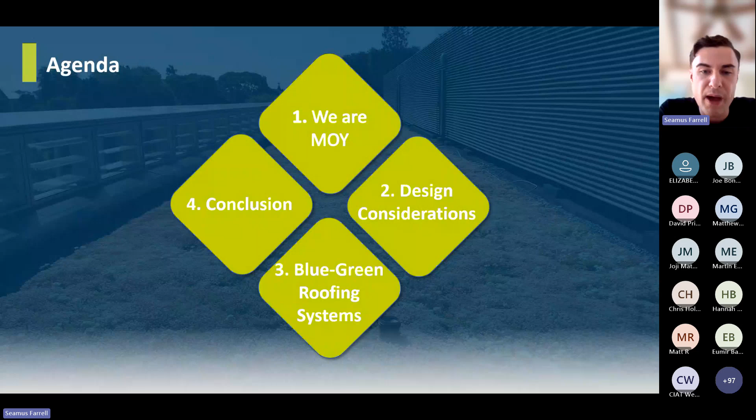Firstly, I'll explain the technology available to the roof designer. I'll present a logic chain that can be applied to the design process. I'll then alert you to the challenges that a green roof can present, and I will assist you in avoiding difficulties that may arise. And all in all, I'll explain the processes involved in the development of a blue-green roof waterproofing specification. So the agenda for today, firstly, I'm going to briefly introduce Moy to those who aren't familiar with us. I'll then go through some of the design considerations for when working with blue-green roofs on projects. And then I'll go through in detail the different systems available to the clients and the benefits of installing blue-green roofs.

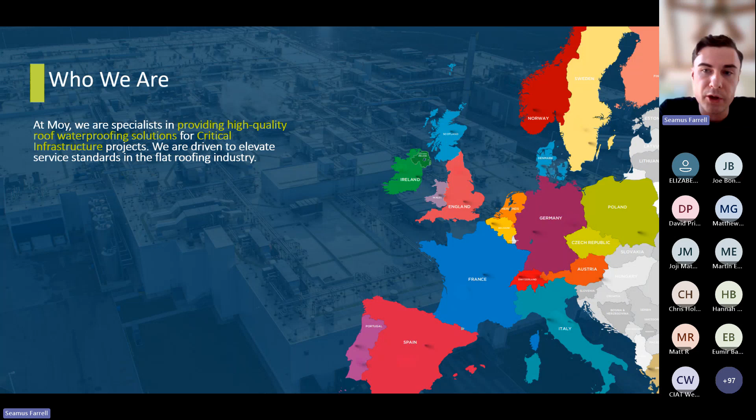So very briefly, Moy are a privately owned business that specialise in delivering high quality flat roof waterproofing systems that provide critical solutions to infrastructure across Ireland, Europe and the UK. Our core values revolve around integrity, partnerships, social responsibility and continuous evolution, with the purpose to provide our customers with a high quality technical service and a seamless experience from the conception to completion of a project.

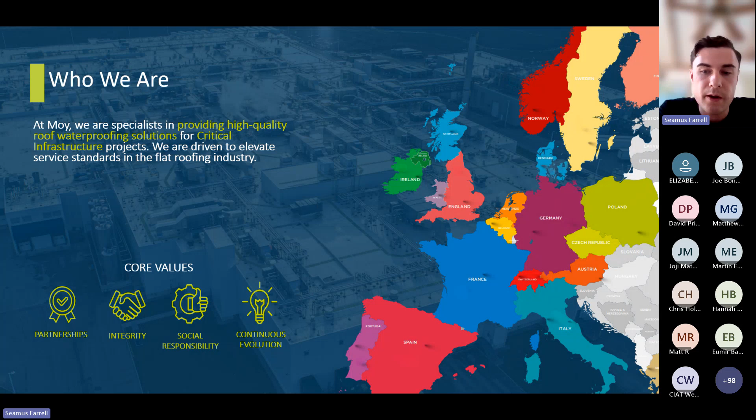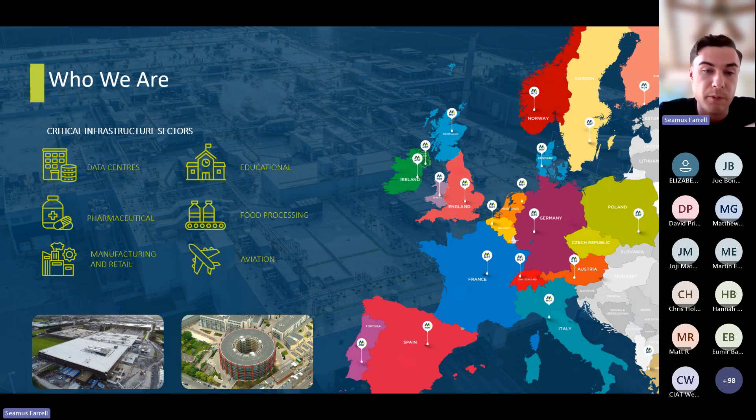And these pins highlight the countries where our business has experience in supporting critical infrastructure projects. And these projects consist of some of the most challenging sectors known to the flat roofing industry, such as data centres and pharmaceutical facilities. However, in the UK and Ireland, we'll work on every sector, from small residential developments to large commercial projects. So now I've completed the brief introduction, it's time to move on to the design considerations for when designing a blue-green roof system.

So firstly, to start off the presentation, what is a blue-green roof? And I'll begin with some simple definitions. I'll firstly explain the definition of a blue roof, and then I'll explain the definition of a green roof, and these combined create a blue-green roof system. So a blue roof is the roof of a building that is designed to provide temporary water storage and release it over a period of time, usually between 24 and 48 hours. And a green roof building is any structure upon which the final finish will be a vegetative layer of any kind.

And to summarise the different layers of a blue-green roof system, which you'll see on screen there, from top to bottom, firstly, the partial or complete covering of vegetation. And this is what's seen once the roof is completely installed. This can be an extensive sedum blanket. It could be shrubs. It could be trees, water features. It's essentially the finished roof, and it's what's seen when the client looks out on the building.

Next is the growing medium. So this is essentially the soil layer. It's a fancy word for the soil layer to allow that vegetation to grow and flourish. Then we have the filtration layer, which essentially blocks sediment from reaching the drainage system, and that's installed directly underneath the living layers of the roof. Then we have the drainage and reservoir board and the attenuation void former.

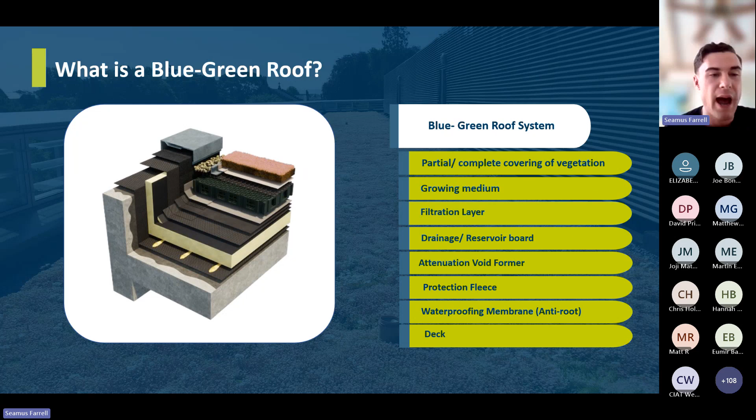And then we have the typical flat roof waterproofing membrane, which will usually be an anti-root membrane to resist the damage from roots, and then your insulation and your vapor control layer. So I'm just going to briefly go through some of the key terminology that's involved in blue roof systems. Some of these definitions are more engineering definitions as opposed to something that an architect would be familiar with. So I'll begin with the HMAX, which stands for hydraulic max.

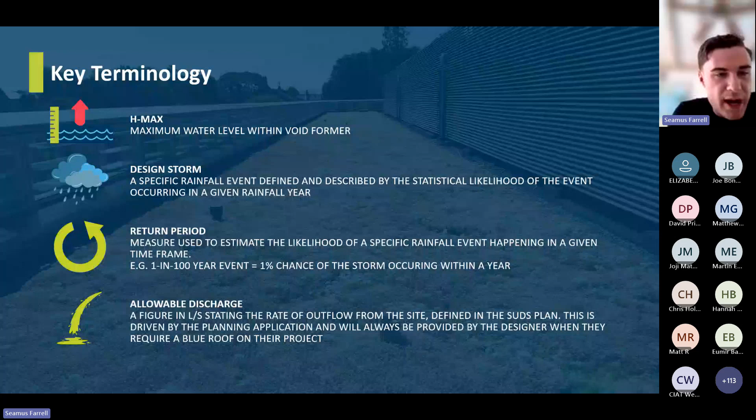Hi, Seamus. Sorry guys, I think I just cut out there. Can you guys still hear me? Yeah, hi, Seamus. You can hear me. I think it cut out for a little bit, probably about half a minute back, roughly. Perfect. So was I on this slide here? The key terminology you were on. Yeah. And I believe when it cut out, you were talking about allowable discharge. Okay, perfect. I'll just go back to the return period part just in case anyone missed that.

Apologies about that, guys. So the return period is essentially a measure that's used to estimate the likelihood of a specific rainfall event happening within a given time frame. And the most common one is a 1 in 100 year event. So this basically means it's a 1% chance of the storm occurring within a given year. So every project that we look at, there will be a specific return period which the roof will be designed to contain. And then finally, allowable discharge.

So this is a figure that's stated in litres per second, and it states the rate of outflow from the site. And this is usually defined within the SUDS plan. It's driven by the planning application, and it'll always be provided to us at the beginning of a project when the designer requires a blue roof on the project. So that's just some of the key terminology involved in blue roof systems.

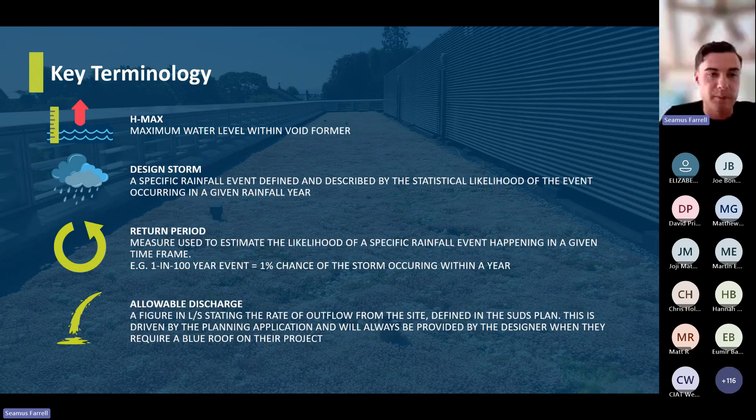So moving on to some of the benefits of blue-green roof systems. Blue roofs are designed to slowly drain stormwater over a period of time, and they reduce the impact of what's called pluvial flooding. This is a type of flooding that occurs when the public drainage system overflows due to heavy rainfall. They reduce the pollution of waterways in urban areas, which is caused by combined sewer overflows. So in urban areas such as the centre of London or the centre of Dublin, older cities, there's an old drainage system, and the foul and the surface water is actually drained within the same pipe.

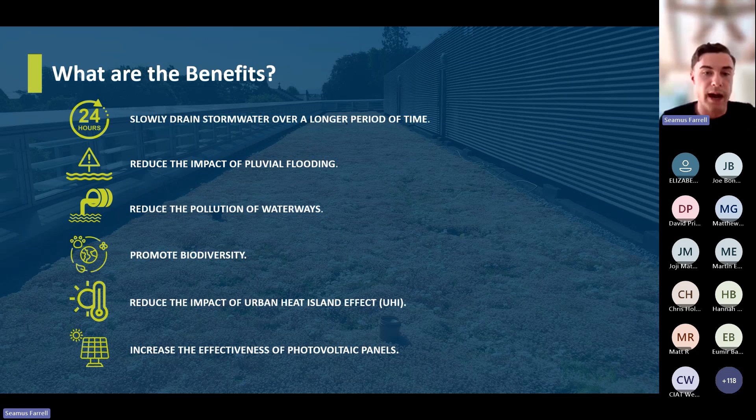And when there is an extreme weather event, these pipes tend to overflow at the discharge points, which is always at a water body, let's say. So that pollution can obviously cause damage to wildlife within that waterway. They can also promote biodiversity when combined with green roof finishes. They can store water on roofs, which actually reduces the impact of what's called the urban heat island effect, and this can ultimately reduce the cost of cooling. And they can also increase the effectiveness of PV panels on the roof due to this cooling effect on the surface of the roof system.

So why are blue-green roofs specified? The main driver for the specification of these is the planning requirements set out by local councils. And it's mainly where space is an issue for other sustainable urban drainage features, and this includes attenuation ponds and underground attenuation tanks. As we are building in these urban areas, there is usually a lack of space for these large attenuation tanks. So that is where blue roofs can sometimes be the only option to provide this water attenuation. And clients and designers sometimes do specify blue roofs or blue-green roofs for aesthetic purposes when combined with green roofs, or to provide water for rainwater harvesting.

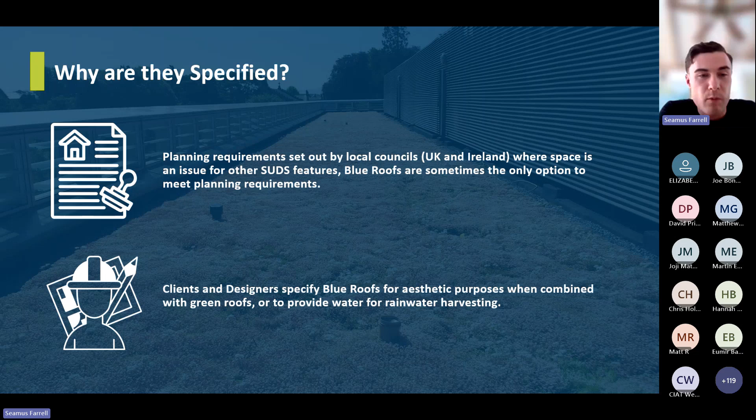So moving on to the different waterproofing systems and finishes which can be used in conjunction with a blue-green roof. Firstly, a modified bitumen system which can be fully bonded from deck to the waterproofing is the most common system specified with a blue-green roof. This is because these are tried and tested systems. They're typically the most robust system for a typical roof area.

Single ply membranes, which you'll see in the middle, can also be used. However, we will ensure as the supplier that the most robust membrane is specified due to the addition of the water attenuation layer and that extra level of water that's attenuated on the roof. And finally, hot melt systems or podium deck systems. These are used in areas with extreme traffic, such as a ground floor podium, with fire truck or vehicle access. Any roof which has a higher amount of traffic is where we would typically specify a hot melt system.

And then the finishes, so there is a range of finishes available. The most common one is just a typical green roof with a sedum layer. Paving and ballast can also be used in conjunction with the blue roof. These are installed in the same way as a green roof, on top of the void former attenuation layer.

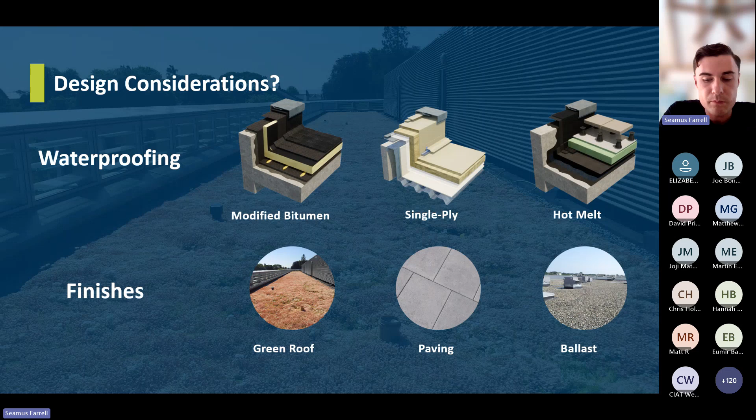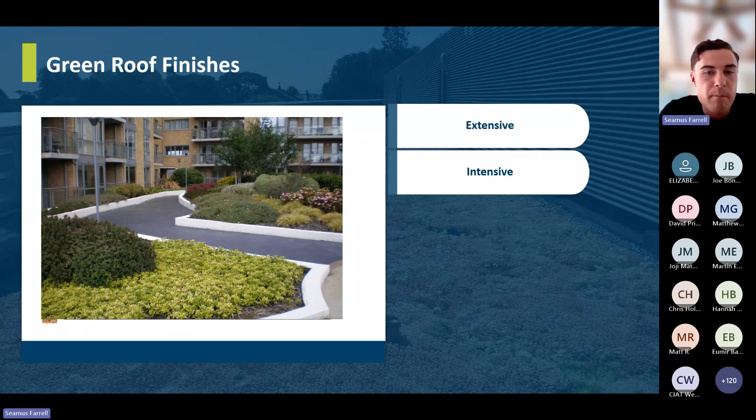And moving on, I'm just going to touch on the different types of green roofs. So these are the finishes that will be installed above the blue roof system. The two main different types are intensive and extensive. Extensive green roofs are typically the most common form, because they're low maintenance and they're a lightweight system. They're usually used on roofs with no general access, so roofs that are only accessed for biannual maintenance.

They have thin layers of growing medium, typically between 50 to 150 millimeters in depth. They're really only used for aesthetic and environmental purposes rather than functioning as an accessible roof space. And the big point on extensive green roofs is they can withstand harsh environments such as wind, droughts, flooding, and high and low temperatures.

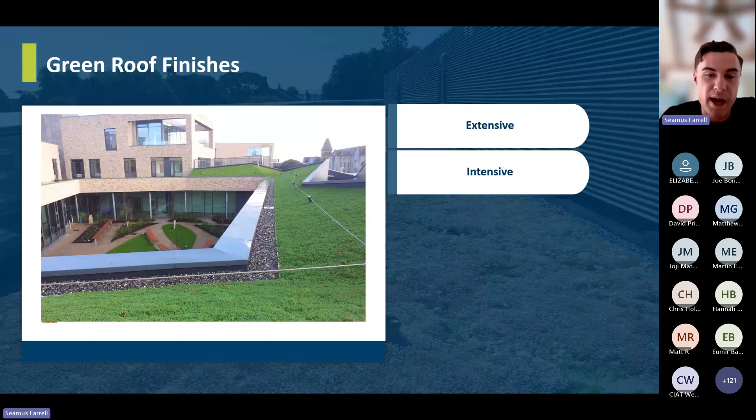Intensive green roofs. These are roofs that typically have a substrate or a soil layer, typically over 200 millimeters. And there's a greater scope to design and grow elaborate roof gardens. This is usually done in conjunction with a landscape architect appointed for the project. They're more suited to roofs with high visibility and more public access. And the opportunities are endless with the different vegetation that this roof can support, such as flower beds, trees, water features, benches, and gravel paths.

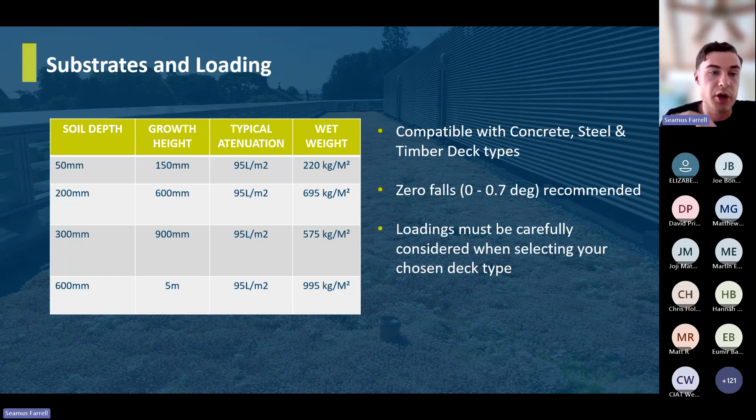Loadings are fundamentally important due to the additional saturated weight of the blue-green roof system, depending on the design and depth of the growing medium. So it's important that we engage with the engineers early on when a blue roof is being specified to ensure that they take into account the added wet weight of the roof system.

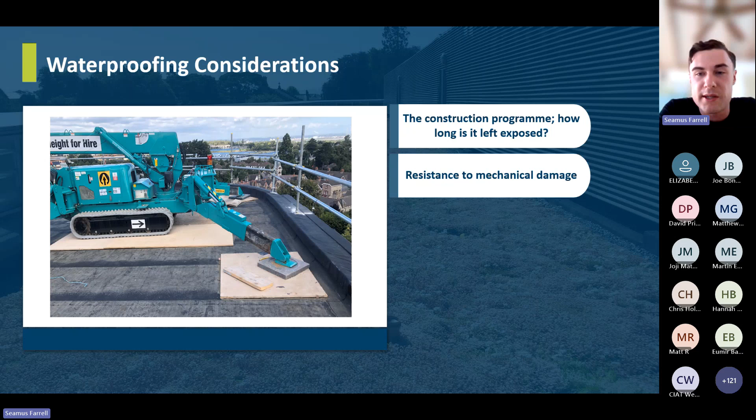So moving on to the considerations for the waterproofing. One of the most important elements of the design is the selection of the appropriate type of waterproofing. We always ask designers to consider the manner in which the building is to be constructed and ask if the waterproofing system must withstand hardship while the roof is used as a working platform.

The ability of the chosen system to withstand the rigorous attack of plant roots is really important for blue-green roofs, as the waterproofing system must be root resistant as well as being robust. With this in mind, the system specification that we'll propose will be discussed at length to enable us to propose the best solution for individual projects. This is to enable you to select a waterproofing system with a proven track record in successful blue-green roofs.

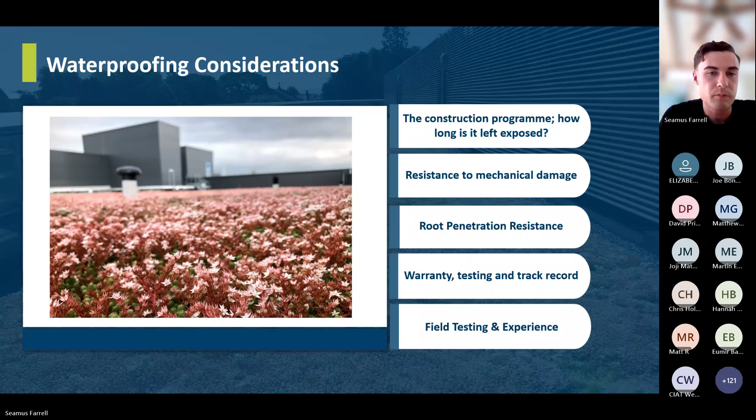So the next element to discuss is the attenuation layer, and this is kind of the key element within a blue-green roof system. So the thickness and type of layer that will be used will always depend on the sustainable urban drainage requirements that are set out by the local planning authority, and also the site master plan designed by the project architect. So the HMAX, or the attenuation level, will be determined by the project-specific blue roof calculation, which must be completed to confirm that the design will actually work in practice.

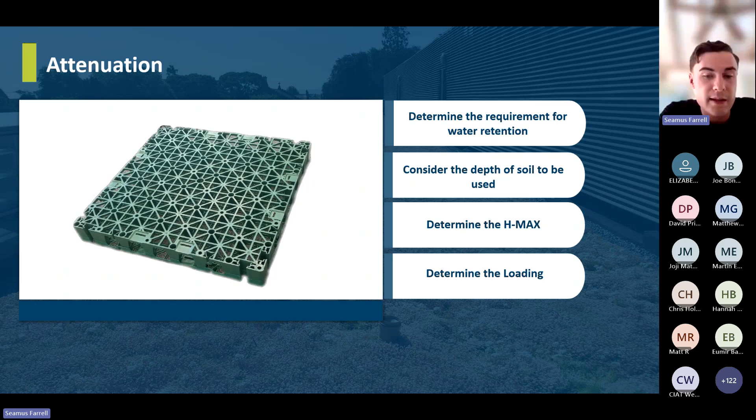And the type of void former, which you can see on screen there, will be determined by the loading requirement for the roof system. For example, a ground floor podium roof will require a void former with a higher compressive strength compared to a roof that is only used for scheduled maintenance. And as a supplier, it's our responsibility to ensure that the correct void former, thickness, and strength is specified for the roof that is being designed.

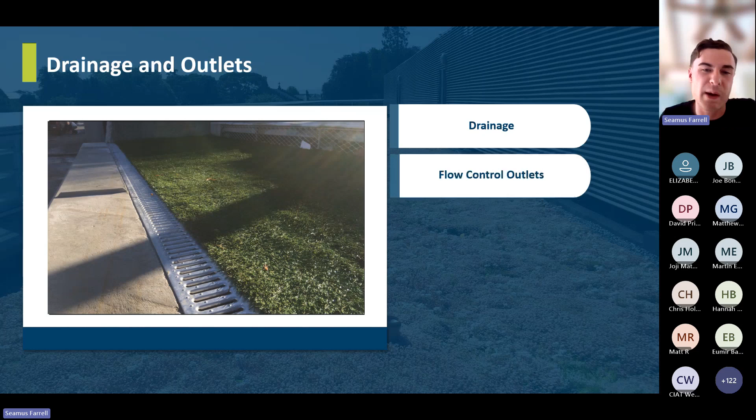So moving on to drainage and outlets, we always get asked by architects and designers how many rainwater outlets should be provided for a given roof area. And as a general rule of thumb, a minimum of 2 outlets are needed to prevent blockage. So, if you only have 1 outlet on the roof, if that outlet does get blocked, that roof will begin to flood. As blue roofs are flow restricted, the outlets allow the slow discharge of rainwater. Usually more outlets are needed on the roof.

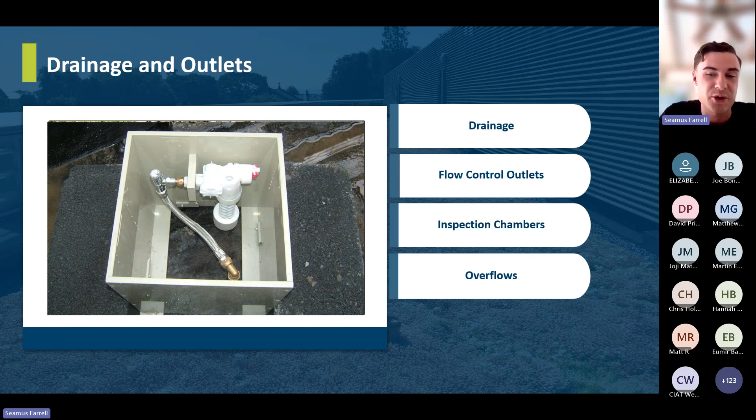However, sufficient overflow outlets should be provided in case there is a rain event that exceeds the design storm of that project. And the invert level of these overflows will be set at the HMAX level. And the inclusion of a green roof will usually give the designer a far greater potential area per outlet, as the flow pattern of water through our green roofs is dramatically slower than runoff from a regular hard surface. And in all cases, the relevant European standards should be read in conjunction with the FLL guides, part 4.3 and 6.3.4, as there's not currently a coherent guide which addresses the issue of drainage from roof gardens.

So looking at the outlets installed on a blue roof more specifically, these blue roof outlets are unlike any other rainwater outlet type, such as a typical gravity drainage outlet or a siphonic outlet. And the purpose of the blue roof outlets is to restrict discharge to a specified rate in litres per second to allow the roof to drain over 24 hours.

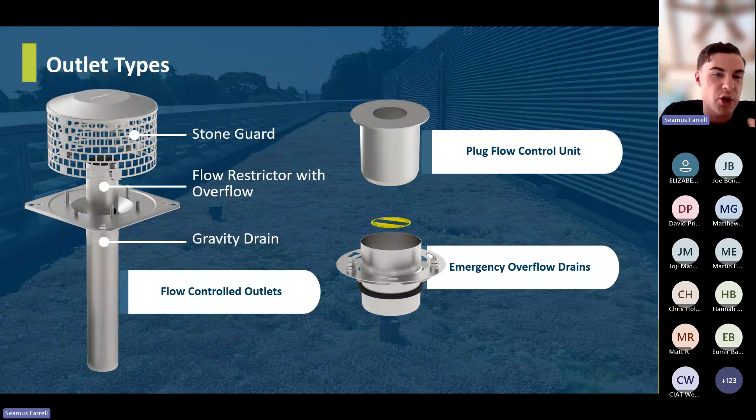And the image on the left is a typical vertical flow restricted outlet. You'll see the flow restrictor, which is installed into the gravity outlet with an orifice which is sized to the specific diameter required. And typically this orifice diameter is between 15 and 30 millimeters and will differ from project to project. This outlet also includes a built-in overflow pipe, ensuring that if the water level does exceed the designed HMAX, the roof will still drain effectively. You'll see on the right hand side, plug outlets can also be used, along with separate emergency overflow outlets, which are both installed into that gravity drain, which you can see noted on the left.

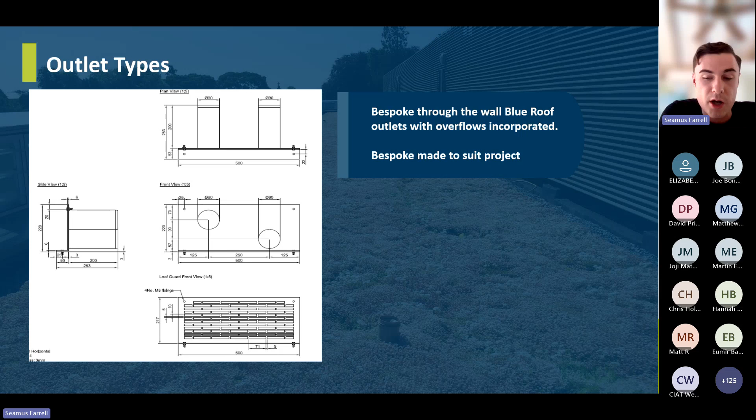So architects always come to us and say, look, designing internal pipework can sometimes be more tricky, depending on the project. So what you see on screen there is actually a shop drawing for a through the wall parapet outlet with the flow restrictor. And above that flow restricted outlet, there is a telltale overflow outlet, which is installed at the HMAX level. And this ensures, if all the outlets do get blocked at the same time, which is of course really unlikely, that once the HMAX level is reached, water will spill off the side of the roof and will notify the client that there is a blockage. And this type of outlet allows designers more flexibility when designing blue-green roof systems. And they're all bespoke made to suit the project-specific calculations.

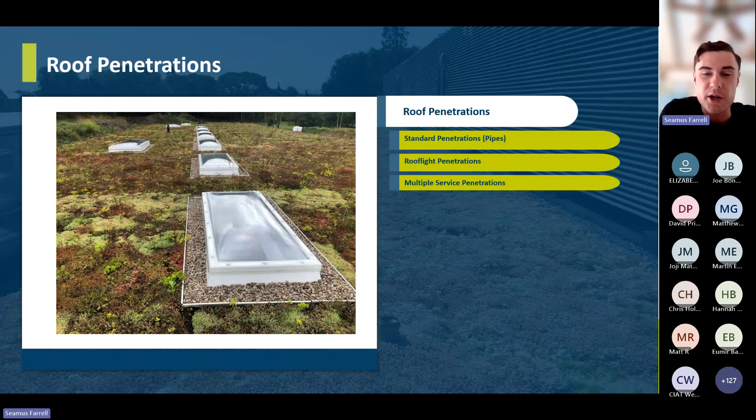So just finishing off the design considerations: roof penetrations, specifically single point penetrations. These are usually to facilitate cables and pipes and can be more difficult to weather than the larger diameter penetrations. Most often, such single point penetrations are an afterthought in roof design. We commonly see instances where an HVAC or an electrical engineering firm are given permission to route cables and take on the weathering responsibility for themselves.

In most of these cases, the cable or the M&E installers will neither have the expertise nor the appropriate materials on hand to ensure a weather-tight seal with a durability that meets or exceeds our expectations for the warranty period. And it's Murphy's Law of waterproofing that states that leaks only occur over managing directors' offices or IT rooms.

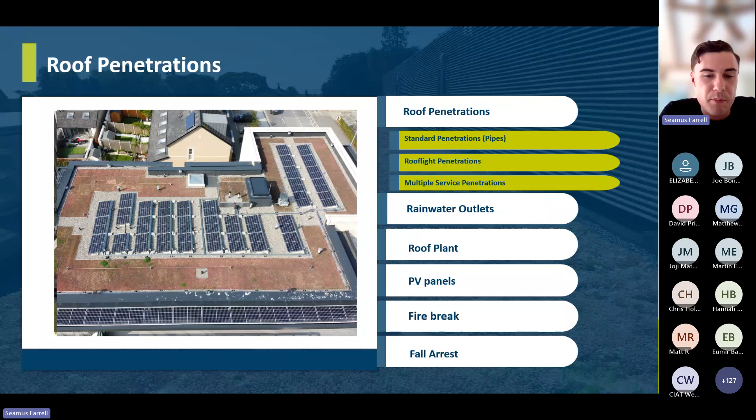So it's really important that all the design considerations are discussed with ourselves early on to ensure a watertight roof area. Therefore, we'll always design and use penetration devices, such as pipe collars or umbrella handles, that are supplied and warranted as part of the waterproofing system and installed only by an approved waterproofing contractor. So they're the design considerations to take into account when designing for a blue-green roof.

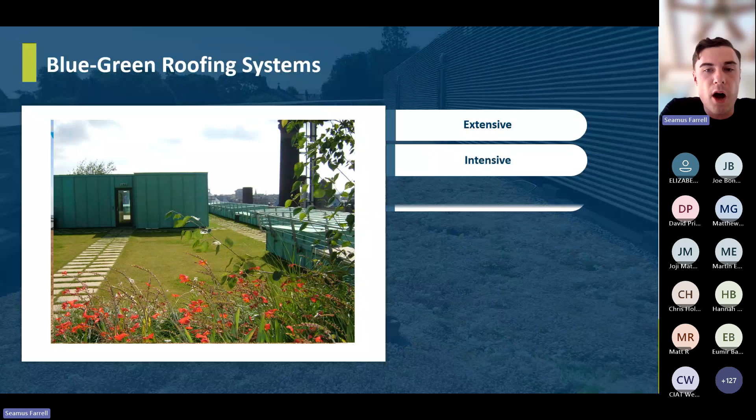In this section, I'll discuss the different types of blue-green roofing systems, the benefits they bring, and some further design considerations. Blue-green roofs with an extensive green roof finish are the most common form of blue-green roofs due to their lightweight nature and low maintenance, while intensive green roof finishes can also be used to provide amenity space for the building residents and also to allow any of you landscape architects to get creative with your design.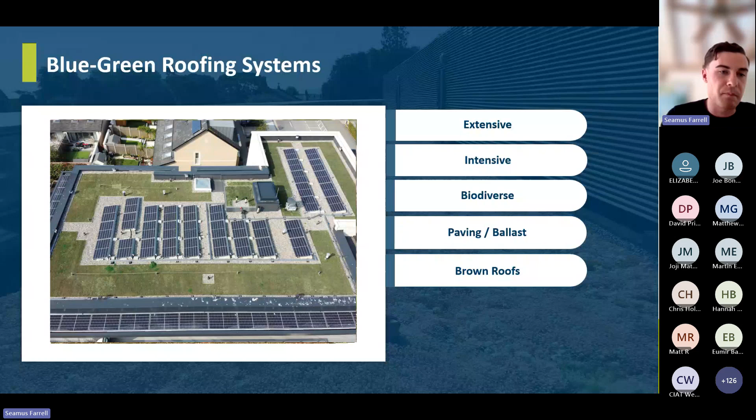Biodiverse roofs are essentially green roofs with vegetation blankets with a more diverse range of planting species specific to the local flora of the area. They're becoming much more common now due to the biodiversity net gain requirements set out by the governments. A blue-green roof can also be finished with paving or ballast, and this can be a more cost-effective solution for projects where there is only a rainwater attenuation requirement and not a biodiversity requirement. So they can be a more cost-effective option for the client.

So moving on to some of the key points when detailing a blue-green roof system. There are some extra measures that we take into account when providing construction details for blue roofs, due to the volume of water that's being stored on the roof for an extended period of time. As penetrations present the highest risk and are considered the weak points on a roofing system, an exclusion zone is installed around the outlet to ensure that any water ingress around that penetration does not track back to the main field area and cause further problems.

And you'll see that on screen there. I'm going to move my mouse, just hovering over it. You'll see that the AVCL, or the vapor control layer, is lapped back to the base sheet, and this means that if there is any water ingress here, it does not track back through to the field area. These are installed in a box. If you were to look at that in plan, it would be a box around the outlet, 250 millimeters away from the outlet.

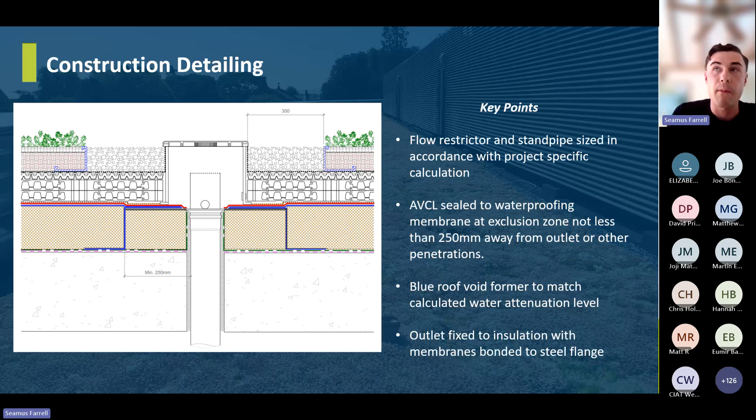Some other things to take into account: the flow restrictor and standpipe, which is sized in accordance with the project-specific calculations, and the thickness of the void former, which is shown here. This will match the calculated water attenuation level. The outlet is actually fixed through the insulation into the structure, whether that be concrete or steel, and the membranes are bonded onto that steel flange, as you can see here in the detail.

So I'm just going to clarify and summarize the engineering benefits of blue-green roof systems. Firstly, we have an increased lifespan of the waterproofing membranes in the system. They provide rainwater attenuation or flood control. They provide an acoustic barrier which works both ways, internally and externally. They reduce air conditioning and heating costs due to the evapotranspiration of the planting on the roof, which basically provides a cool layer above the roof system.

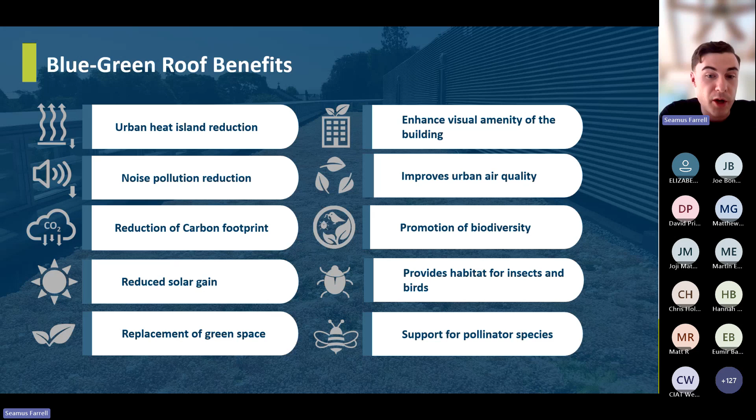They provide a replacement of green space. They promote biodiversity, and they support pollinator species such as bees. They provide noise pollution reduction due to the extra layers of mass on that roof. They provide a reduction of carbon footprint, and they provide habitat replacement.

So I'm just going to summarize some of the maintenance requirements for blue-green roof systems. Now, we do have kind of an extensive document that goes into detail on this kind of maintenance requirement.

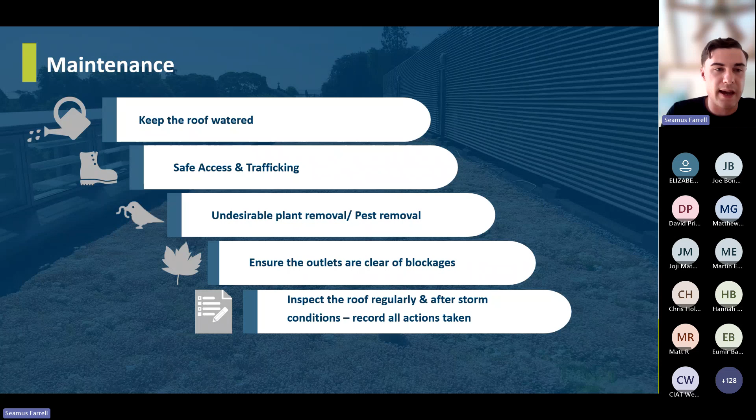However, it is a requirement for the building owner twice a year just to double check that the outlets aren't blocked. And I already mentioned the last point there, to inspect the roof regularly and after storm conditions, and to record all actions taken. And if anyone has any questions on specific maintenance guidance, as I said, there is a full document outlining this in detail. So I'm just going to close off the presentation now.

I think I'm still good for time.

So look, when we consider the building life cycle, we are seeking to provide roof systems which will yield the greatest possible lifespan. And this utilises products which will have the lowest possible quantity of embodied carbon and which may be reused or recycled upon the end of service life. And we as a company are continually striving to reduce carbon bottlenecks through the selection of appropriate materials and through progressive management of the logistical chain. In the movement of goods, we are always looking to use the most efficient mode of transport and moving only full loads of materials.

And as we discussed in today's presentation, the addition of living roofs or blue-green roofs offers valuable UV protection, which considerably extends the service life period of the roof. Also by choosing native species and habitat replacement, we can give back habitat space to the local environment by providing a soil layer which supports key pollinator species like solitary mining bees, for example, who are essentially the heavy lifters of the bee community.

And when we incorporate the blue roof technology within green roofing, we're adding the capacity to temporarily store rainfall upon the roof, which becomes a valuable contribution to the local sustainable urban drainage targets, and is also mandated in most local authority areas where urban flooding is a cause for concern. And all these measures will make a considerable contribution to the roof when analysed under the BREEAM or LEED methods of environmental assessment. And we can make economical as well as environmental sense to building owners and operators.

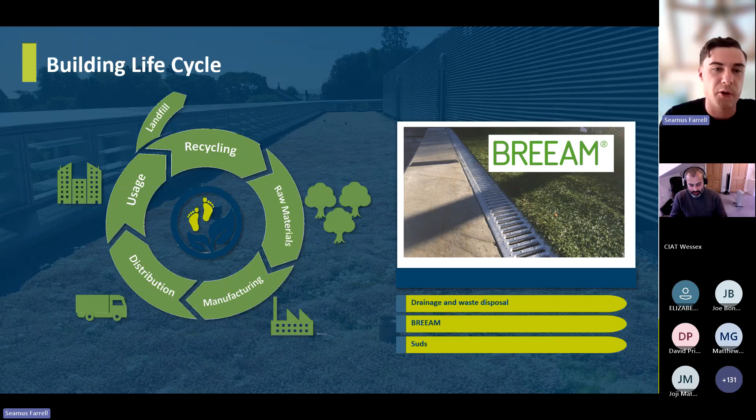So just touching lastly on the BREEAM requirements, we've actually had to train one of our own staff in BREEAM assessment. So we do have a pre-construction manager on board now who can assist any designers in making sure that the roof system specified meets the required BREEAM requirements.

So just to summarise the end of our presentation, hopefully everyone here is now in a position to appreciate that the practicality of a blue-green roof doesn't just come down to one piece of the construction jigsaw. Only the collaboration of the design team, a system supplier like ourselves, approved contractors, and the main contractor will ensure that this can be achieved. A specific specification is really important to provide a highly functional roof, and I hope that I've demonstrated how each system will have its own place and uniqueness depending on the range of factors that we showed.

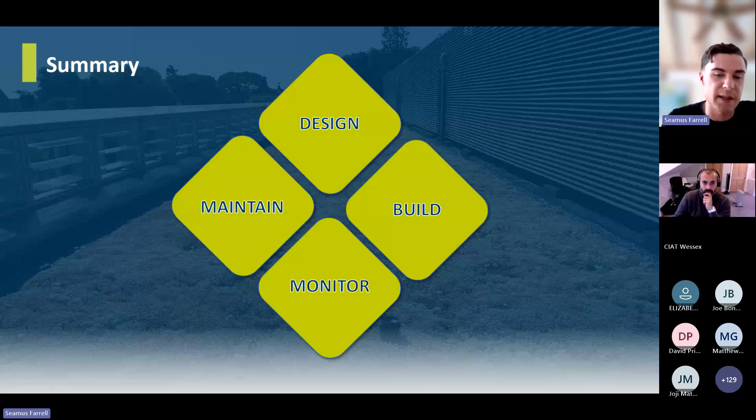The build phase is vitally important as well, and making the right choices around a quality system supplier and the subsequent subcontractor is imperative. Working closely together at this point is the most important part for all of us. Close monitoring to ensure that the specification is delivered, or as close as can be depending on the restrictions, is really important. And finally, to ensure that the roof system performs for its intended lifespan, maintenance programs must be in place, and these will vary depending on the roof system that's installed.